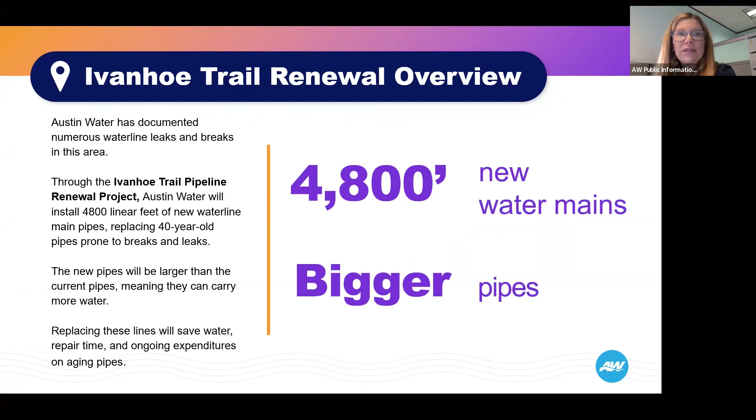So in your neighborhood, we are going to install almost 5,000 linear feet of new water mains. These mains are bigger pipes than you've got there right now, meaning a higher volume of water can flow. The pipes you've got currently are about 40 years old. They're very prone to breaks and leaks. We probably don't have to tell you all that. And so this will be an excellent rehabilitation project.

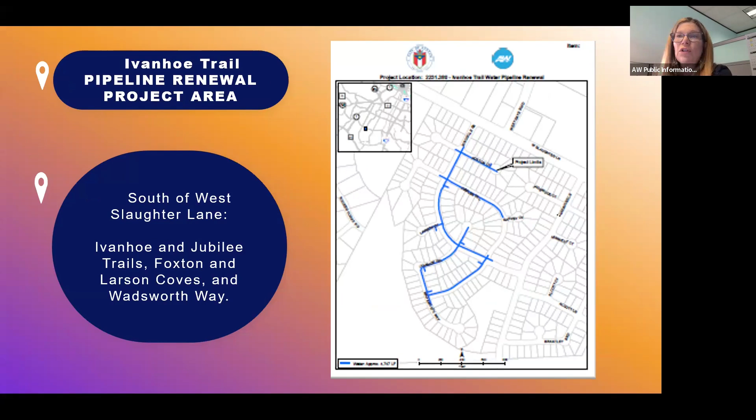So you can see from this map where we're going to be installing new lines, several areas south of West Slaughter Lane. You guys can read for yourselves and look at the map and see where we'll be working. But we're on Ivanhoe and Jubilee Trails, Foxton and Larson Coves, and Wadsworth Way. Okay, now Lisa Whitworth, a very experienced project manager, is going to tell you guys what to expect.

So first of all, this is construction, so it's going to be messy, and for sure by the time this project is done, you're going to be really sick of us, and that's somewhat unavoidable. I'm going to be honest with you. Now, this project is going to probably be in front of your house up to 3 times. You're going to have the installation of the new line in a trench, and then they will have a small crew come behind and lay service lines across to each home.

Then there will be another crew that comes through and pulls up the old line after all the new line is installed and you've been switched over to that. And then there may be another crew that comes in and works on the trenches and recompacts them to make sure that they don't sink later. And so at any time there could be multiple people on the street, but in different areas. But fear not, we will get this done, and hopefully before our deadline. That's what we always hope for. You want to go to the next one?

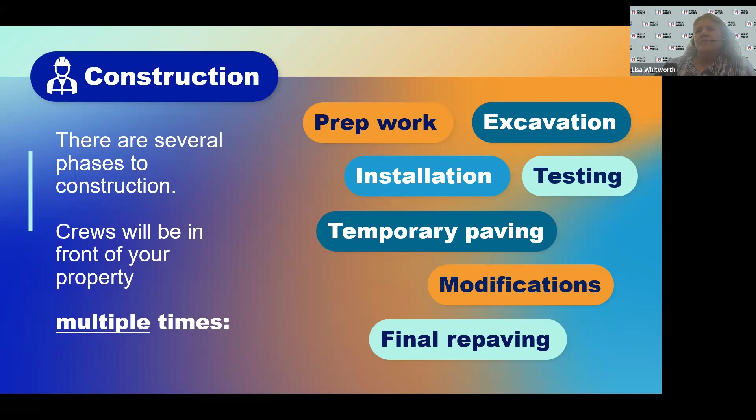Okay, so this construction is open cut, which just means there's a trench running lengthwise down the street. As you can see, it'll be about 4 foot deep, maybe a little deeper than 4 foot. The team will facilitate at any time if you need to get out of your driveway and we're right in front. If you can let us know, call the inspector, even talk to the crew, but just let us know and we will ensure that you're able to get out of your driveway. We are not here to block you in for an entire day. Just give us about 15 minutes ahead of time and we'll get it to where you can exit your driveway.

There will be a jumper on this project, which is like a garden hose type size pipe that will service a home temporarily, and it will be coming out of the trench. Just leave it alone, pretend it's not there. But that is temporary. We will be removing that. And of course, there will be heavy equipment all through this. Next one.

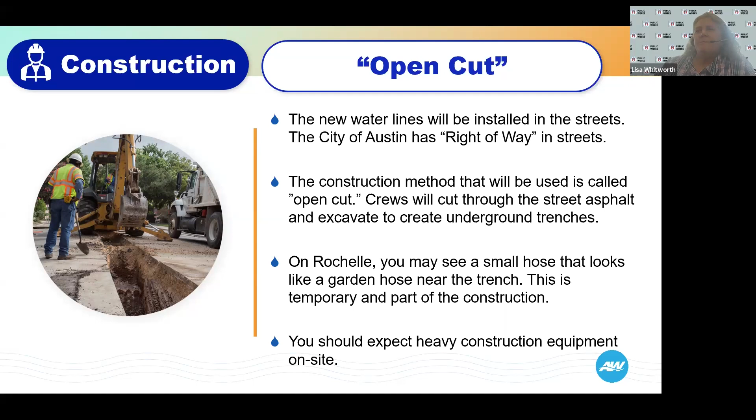Okay, so we already went over, you'll have access to your home. Like I said, if they're in front of your driveway, let us know. Here's the number that you can call the inspector to let them know ahead of time that you need to be out. Again, 15 minutes is ideal. Anything more than that would be perfect. I mean, we'll move as fast as we can, but you need to give us time to get stuff out of the way and get it to where you can get in and out.

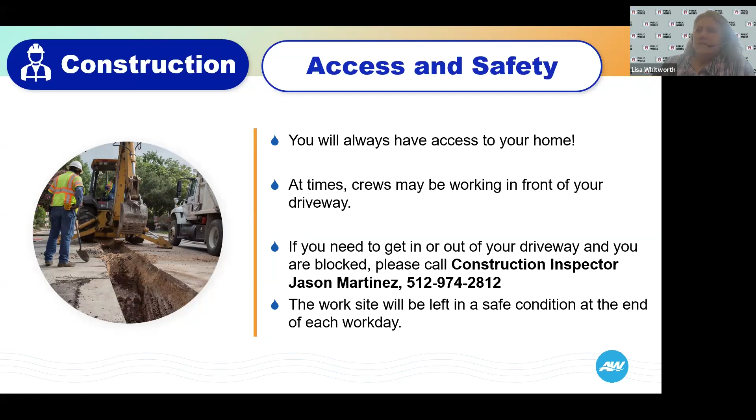And at the end of every day, we will button everything up and we'll police the area, try and get it as clean as we can. But again, it's construction and it's messy.

So while the construction's going on, there's what's called temporary pavement placed over the trench that runs lengthwise down the street. And this is, again, temporary, and we try to keep it as clean and smooth as possible, but it does have a tendency to migrate a little bit. Again, if you'll let us know if there's a big problem, we will make sure and get that cleaned up.

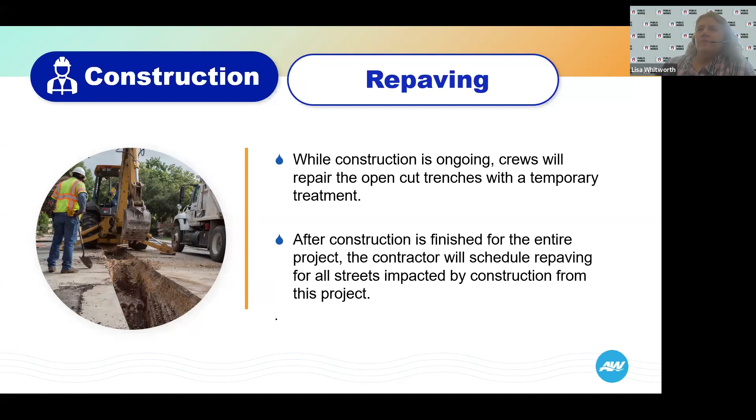At the end of the job, we will do what's called a mill and overlay, and we take like a big grinding machine and we take off about 1.5 inches, 2 inches of pavement that's there and put brand new asphalt from curb to curb in the areas where we've done work. Next.

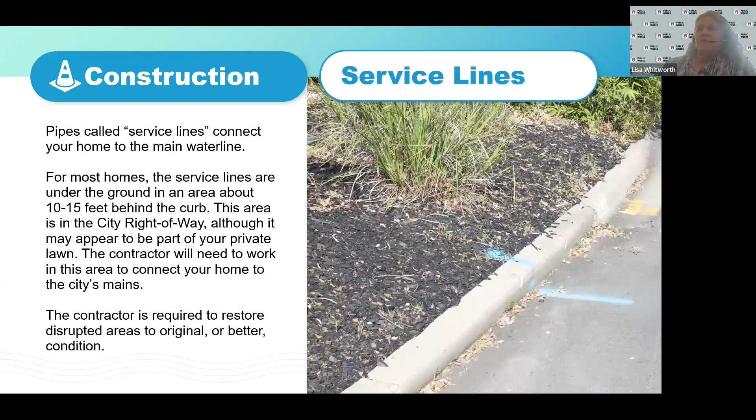So the service lines are the lines that come off the mains, and that's the smaller crew that'll generally come behind. And they run what are called laterals that come straight off of that main line to your yard. We do our best to keep the disruption minimal. We try and do as small a curb cut as we can. Try not to damage anything that's in your yard, but if it is there, we try to put it back exactly like you had it to begin with. And again, if there are problems with that, please let the inspector know.

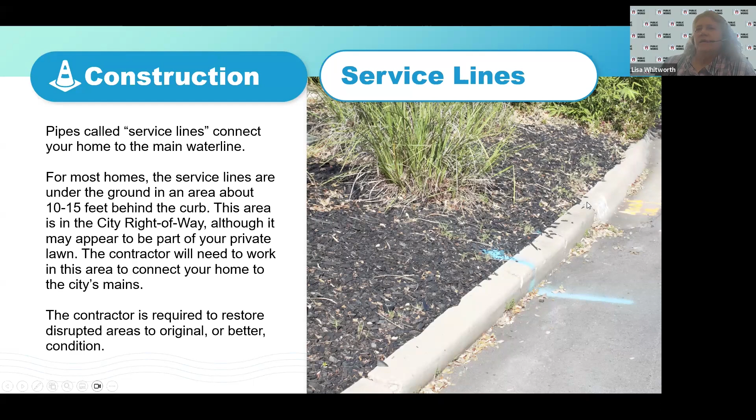Timeline for this one, it's a 21-month project. We will generally be working Monday through Friday, and the work goes from 7 a.m. to 7 p.m. Just know that it is a possibility that there might be some weekend work, but generally speaking, we try to do the work Monday through Friday when most people are at their office.

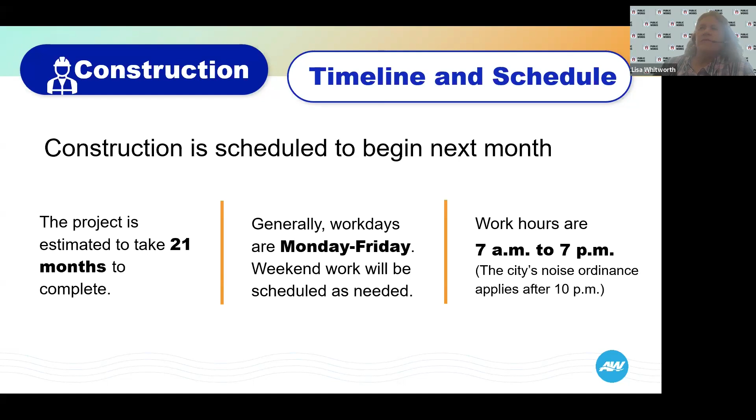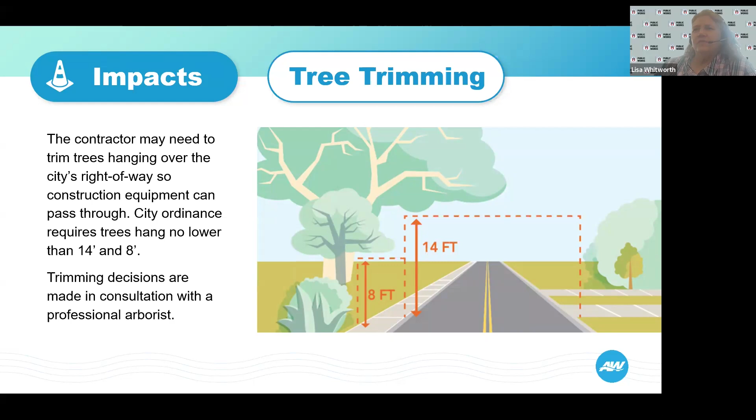And if it's possible, we won't touch the trees. I mean, that's our ideal situation. But in older neighborhoods, sometimes those trees hang over the road, and we have to trim them back. And maybe we can get the backhoe under it, but then the paving company has a great big machine, and we need that 14 foot for that. So there is a reason why we touch them. We don't do it all willy-nilly. We're doing that because we have to. Next.

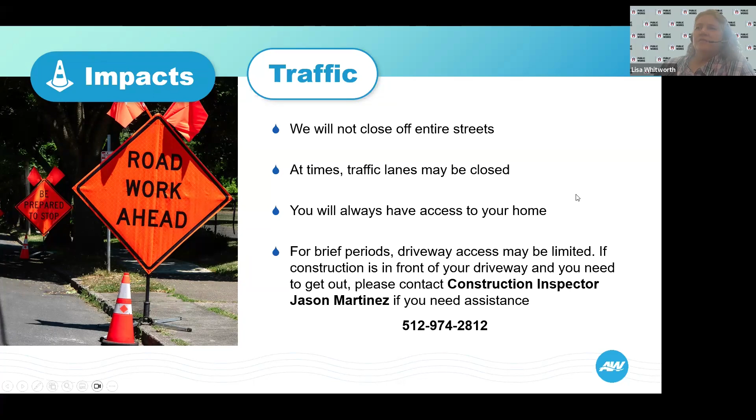We will not be closing the entire street. There is usually a flagger, and we will flag you around, but there will be one side or the other being closed down while we're doing work. If there is a big issue, we might have to close down a lane, but ideally, we're going to let everybody be able to get around us. And again, you'll always have access to your home. And if you need to get in or out, again, let the inspector know, and we will facilitate that happening.

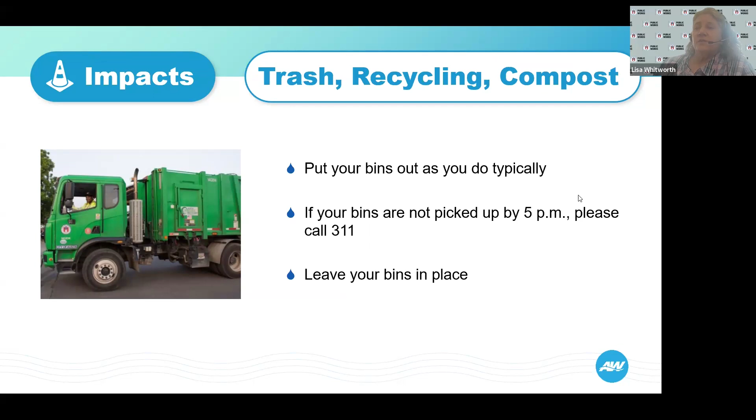Trash and recycling, compost. So for the majority of the projects, we don't have any problems with this, and the contractor does a really good job of helping to get those bins picked up. If they see the trash truck coming, the guys will move your bins to where they're easily picked up. And if for some reason they're not picked up, call 311 and report it. And if they're not picked up within 24 hours of that, let us know. Again, call Jason or myself, and we will get in contact with somebody else to make that pickup.

Planned water outages. We try to do as little disruption as we can to you guys. I mean, as little as you can do with great big giant yellow machines making a lot of noise. But as far as water being out, we do not have a lot of unplanned outages typically on these projects. In other words, we let you know ahead of time that we are going to be doing outages when we're switching over from one line to the other line. And you will get some notification typically the day before that a planned outage is coming.

If something happens and we hit a line, sometimes there are unplanned outages, and we are not able to notify you because we accidentally hit something that we probably shouldn't have. But we will get that taken care of as quickly as possible, and we will, generally speaking, notify people in the immediate area of what's going on.

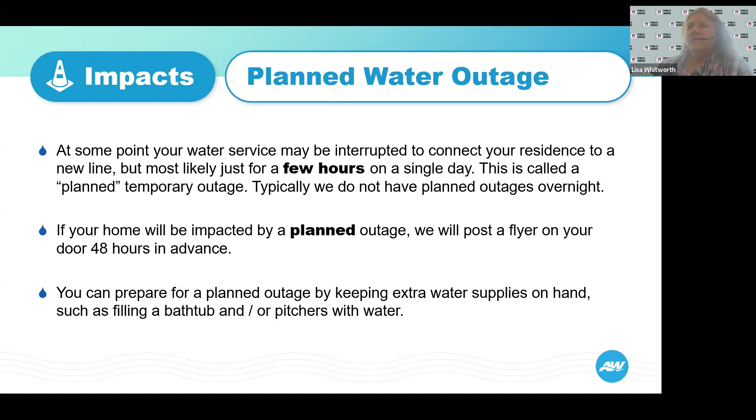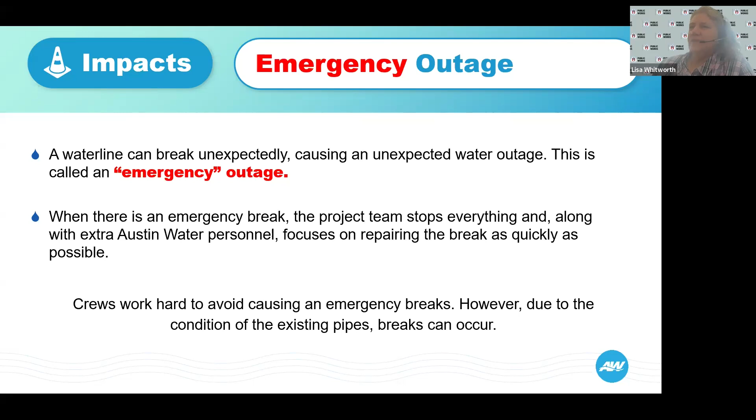Oh, so here's where we talked about the emergency outages. Again, we're talking about a little 1-inch line going across the street. They're real easy to miss sometimes. But our goal is to make it through the entire project without any emergency outages.